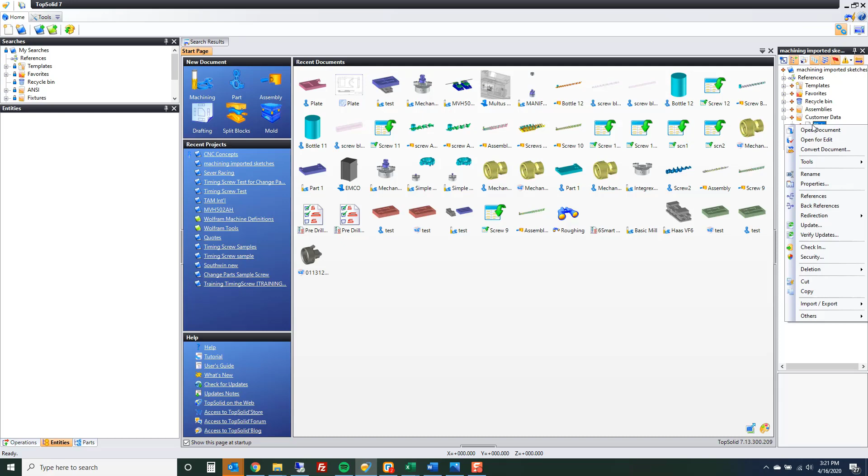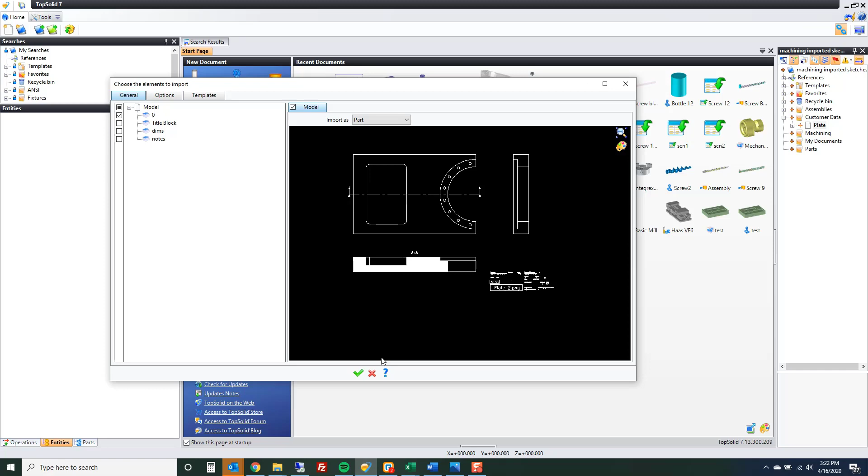So if I go here and choose Convert Document, when this comes up, of course I can zoom out, look at my model. I can look at the layers that are there if there are any layers already. So for example, I don't care about the title block, I don't care about the dims or the notes. We'll just bring in everything else. Apparently whoever made this one left all that stuff on a random layer as well. So we'll go ahead and click OK. Now we have our part.

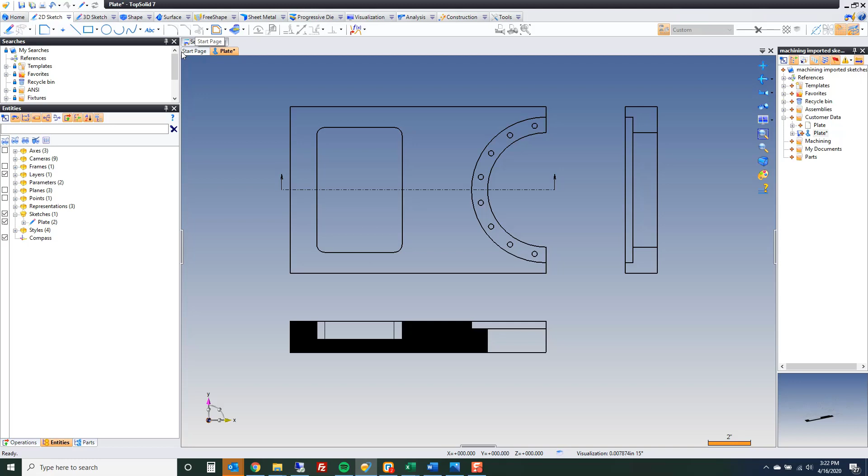Before we can do anything with this part, I want to simplify some things. So first things first, I'm going to go to my sketches here. I'm going to right click on my sketch and make it editable, because when you import a DXF file, it's imported just as you see. I'm going to say keep profiles. This will get rid of all text. But it's not really a usable entity yet. Now it's a usable entity. Now I can edit this.

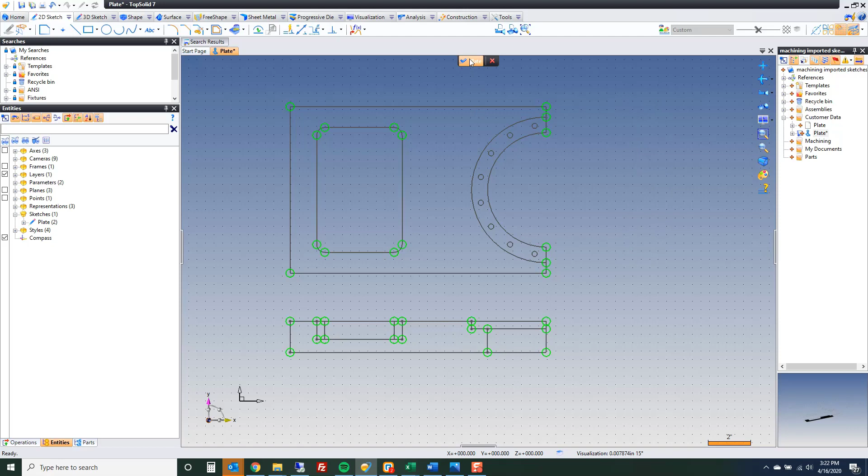Now, if you have a drawing on your workbench already and you already know the depths of everything, you can get rid of everything you don't need. I'm going to say I don't want that. I don't want this. Maybe I don't need this. I don't need this. And since I have all the information down here, I don't need that one either. But I'm going to leave this one just for fun. And now that's as far as I'm going to take it.

Now, before I can send this into a machining document, I need to tell TopSolid to add this to the representations, because again, it's always looking for a solid model. Since one doesn't exist, we're going to kind of cheat a little bit. Let's put the plate in the design representation and in the detailed representation. It needs to be in at least both of those. If it makes you feel better, throw it in the simplified as well. Hit save, I'm going to hit Control S in my case.

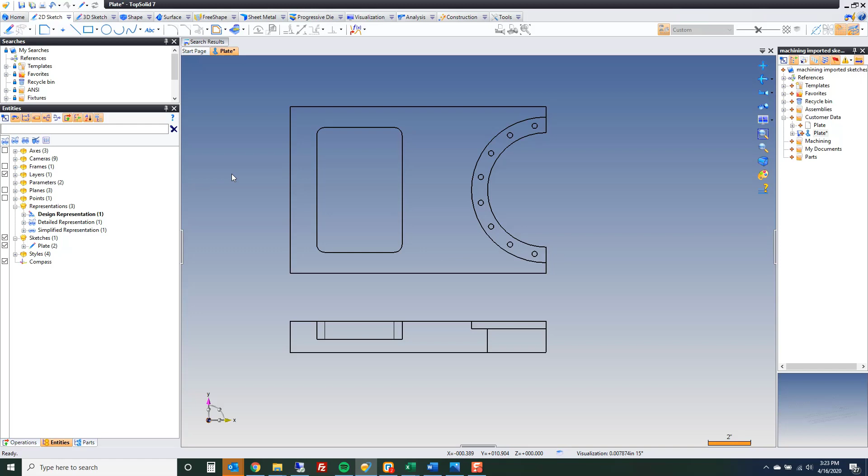And I'm going to send this into a machining document. In this case, I'm going to use a template. You can use your favorite template. I'm going to go ahead and validate, and that's going to load a CAM document and include my 2D drawing there. Now here it's asking me if I want to build stock. I'm going to say no stock, just to show you complete down and dirty how to do things.

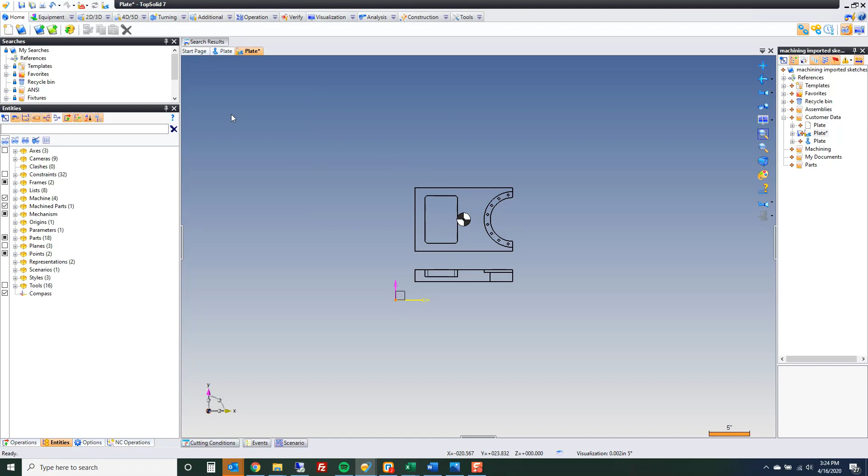Next, it wants to know if you want to position this. You can, but the plate already exists on the XY plane. That's really all that matters. So I'm going to validate my positioning group. About the only thing that I care about is where I put my 0 or my G54. So let's fix that right away. I'm going to edit this, turn off automatic positioning, and put it at the midpoint between that segment and the center of that. Perfect. That'll be my G54. Like that, I'm ready to start working.

Now, before I can start working, I've got to work on these profiles, because if I tried, for example, to go to end milling, go to my geometry and select this, you see how it's selecting just single segments? That's because on imported geometries, the software doesn't know what goes with what. It's just imported dumb sketches.

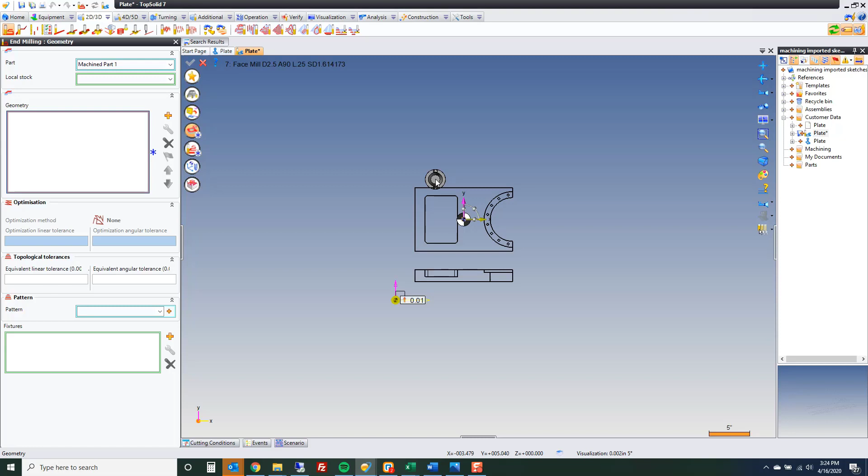So instead, what we're going to do is rebuild our sketches. In some cases, we're going to rebuild by drawing new sketches. In other cases, we're going to project sketches. And the act of doing this also lets us clean the sketches at the same time. Now, this is one method to get to the finish line when using sketches only to create toolpath. There are about 2 or 3 other ways to do this.

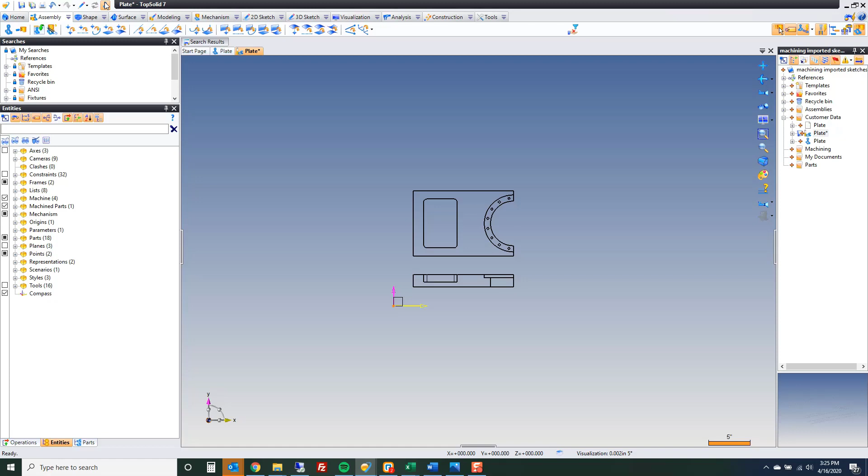So here's what we're going to do. First, I just want to make a rectangle representative of the entire top of the part so that I can create a facing toolpath. So I'm going to right click, make a sketch. I'm going to go to my rectangle command, parallel the axes, and I'm going to go from point A to point B. Perfect. I'm going to validate that sketch.

I'm even going to go into my sketch folder here, and I'm going to call this sketch for facing, just so that I know what it is. Okay? I may turn that off for the moment. Next, I'm going to build another sketch for this area out here to cut this open pocket.

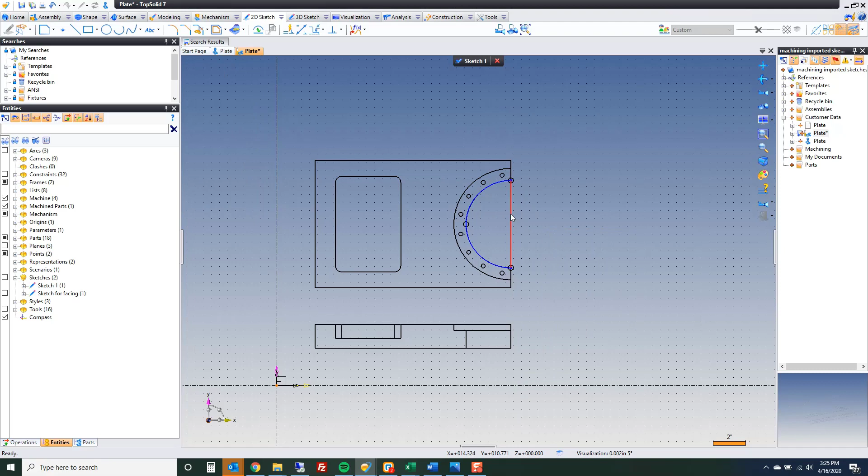So I'm going to create a sketch on the XY plane. This time I'm going to project that sketch, and then I'm going to draw a line connecting the two. This is just so we can describe the open section of the sketch for pocketing. I'm going to validate out of that.

I'm going to rename this open pocket sketch. Now, you don't have to rename these sketches. That's completely optional to you. Okay, I like to do it so that I know what's what. Now, from there, turn that off. I'm going to go back to CAM mode up here.

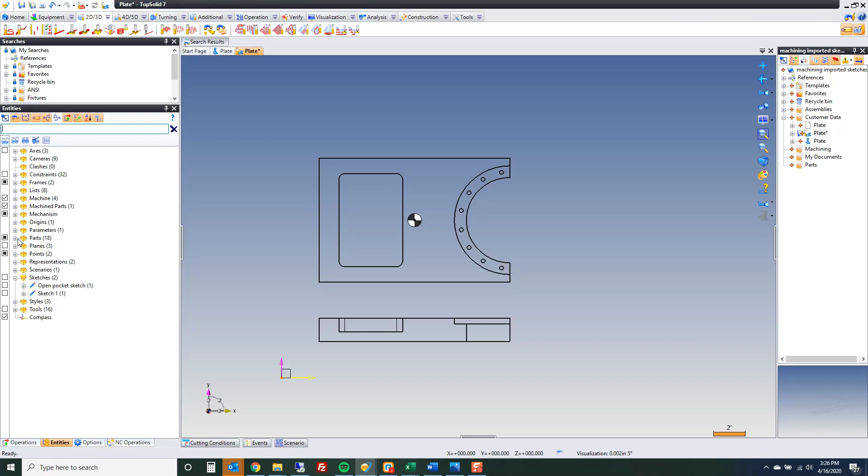And then back in my entities tree, I'm going to go to my parts folder and I'm going to turn off what the software sees as the machinable part. That's that part that I included. This way I can focus on just the sketches I want to work with. So I want to work with my sketch for facing. Here, select it, right click, go to end milling.

You can see it's looking at the entire sketch now. Mine came up and chose my face mill because that's my first tool in my tool list there. Here you can see there's an asterisk. There's an asterisk here because it's missing a bunch of things. If you notice, it's even telling you what it's missing. It's pretty cool. Okay, so let's click on that and let's go to where the problem is.

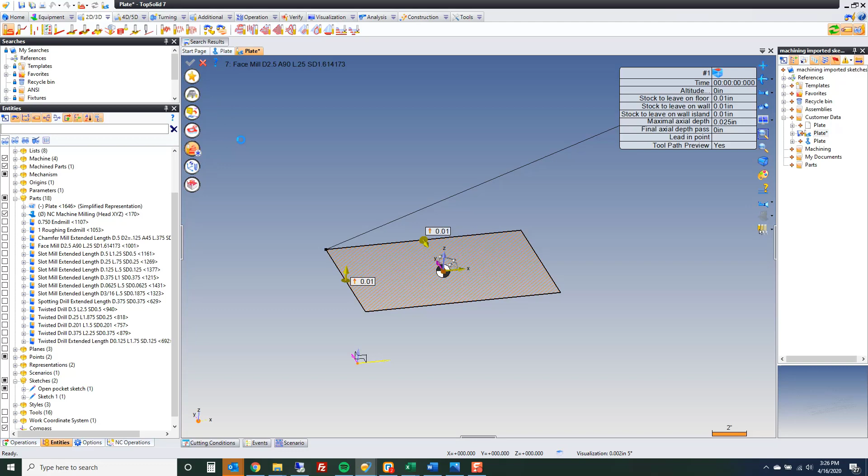If I come up to my altitudes tab, notice my starting altitude is missing, my clearance, all these final altitudes are missing. So the starting altitude is where the toolpath is going to start calculation from. The machining altitude is where it's going to machine to. Okay, so I'm going to start at 1/8 inch above my 0. My machining altitude is based off my profile location, which is on my Z0 right now, so that's perfect.

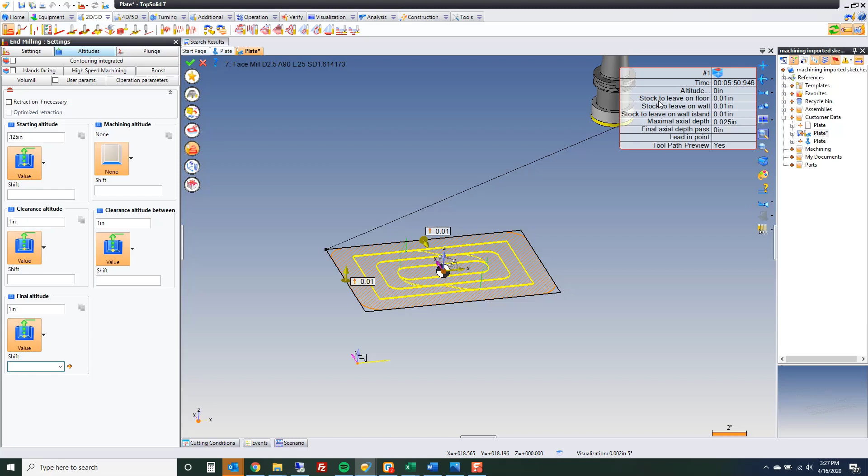And now here, I'm just going to start adding my different rapid planes. Once you have them, you're going to get toolpath. Now, right now, this is set to pocket. If I set this to an open pocket or a facing or something like that, we'll probably get what we're looking for here. Let's go ahead and validate. Oops, looks like I made a mistake. Let's go back. There we go. Clicked too fast. Here we have our facing, as you can see.

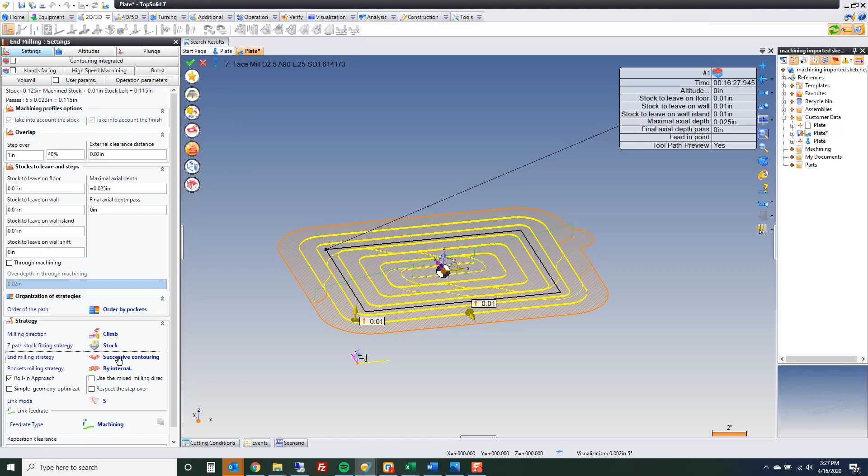If you want, you can change the strategy of the facing. Come to successive contouring, change it to sweeping. You can set how and where this is overlapping. You can even go closer to the part if you want. Would help not to fat finger the value. So if I say -1, you see that sucks it in closer to the part. Okay, and like that, you have your facing.

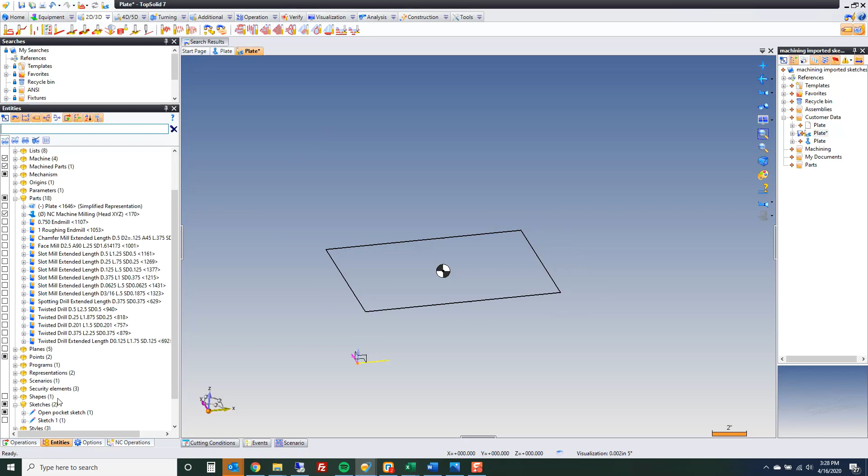Perfect. Now, let's go to our entities and let's turn on our open pocket because that's what I want to work on next. So my open pocket, again, I can go here, start in space even. I don't want to use this tool, so let's go change our tool. I'm going to say, how about my 3/4 inch end mill instead? That looks good. We need some geometry, so let's go to geometry, click here.

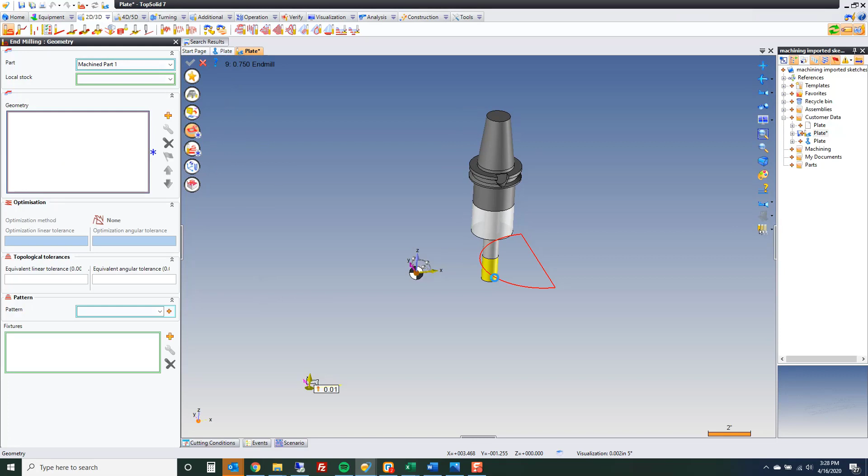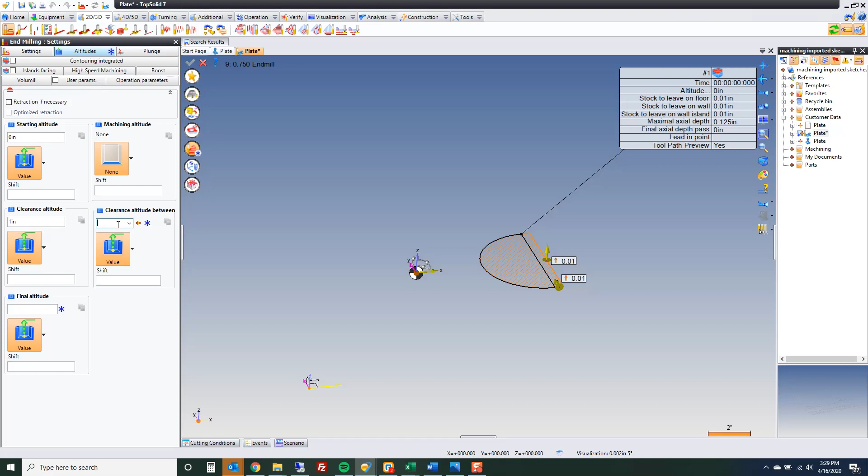Let's change this to open pocket because that's what we want this to be. And then in my geometry section, I can double click on open zone and say this is the open section of that pocket. Okay. Now, again, we have to set our altitudes, right? So the starting altitude is 0 because, again, we've done our facing. The clearance altitude, this is your rapids, right? Now here you only see one pass. Why? Because the machining altitude is machining to the altitude of that sketch.

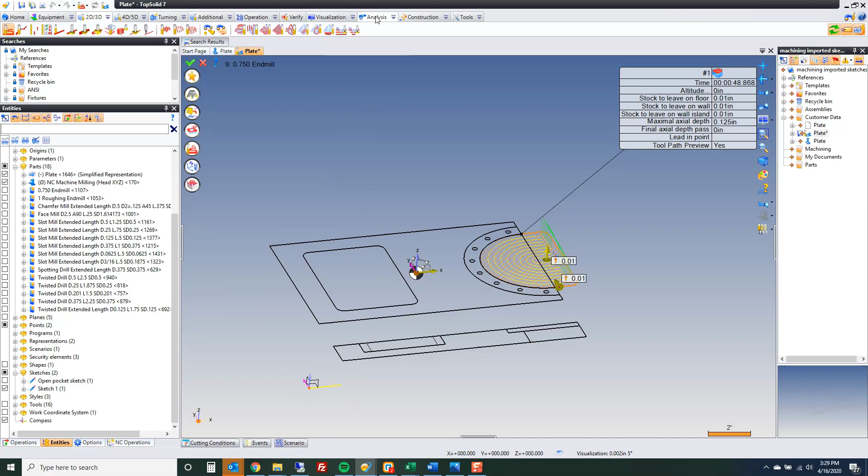Now we want to change that, but we don't know how deep to go. So let's go turn our part back on, right? And we can go here, go to Analyze, and Measure. I'm going to measure this segment. Look at that. That's 3/8 of an inch. Perfect. I can turn this off, zoom back out, and now I'm going to come back into my machining altitude, and I'm just going to set this to a value from my G54, right?

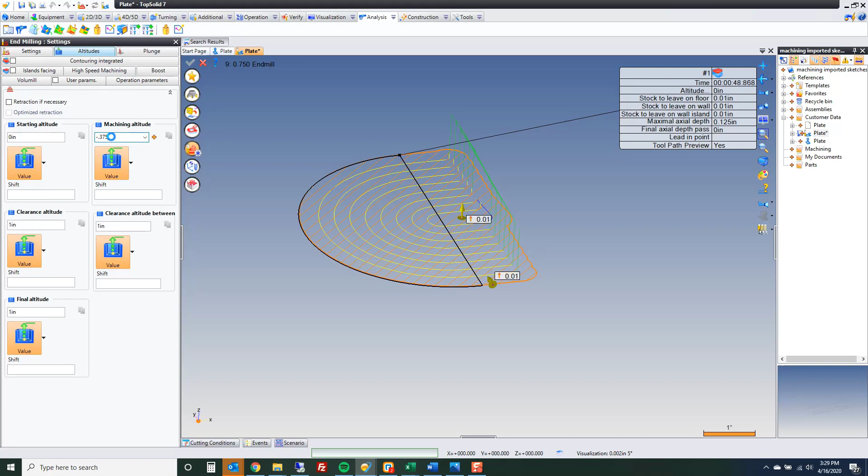So -0.375. So it's plunging in the open zone. Off we go. We're cutting our pockets. All the other settings in there work like normal TopSolid CAM settings. Okay? So let's review. We've done a facing. We've done an open pocketing. Next, let's look at another way of controlling this.

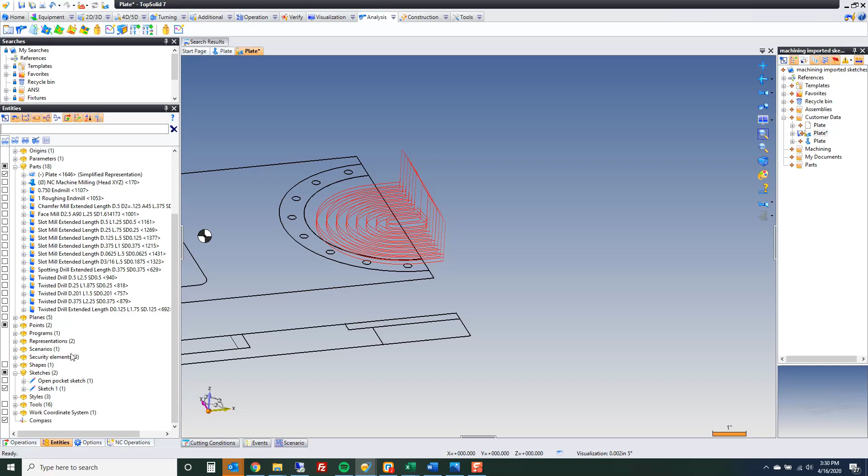Okay? So if I go back and turn on the overall part, right? I'm going to turn off this sketch. If we look at this, there's some kind of shelf right here, right? And you can see that right there. And that's actually 3/8. So I made a mistake when I measured before. It should have been the plate thickness for this through pocket. That's okay. Let's go see if we can fix that really quick.

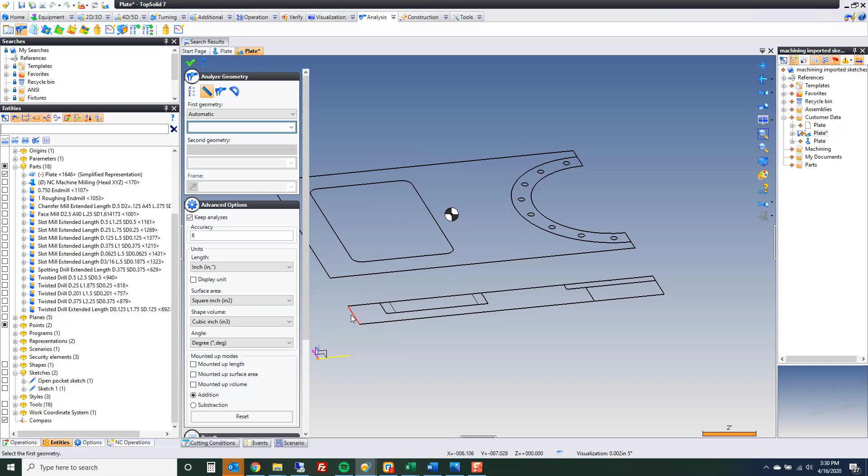Let's go here, analyze that length. It's 1.5 inches. Great. Let's go back to this operation really quick. Go to settings. Go to our altitudes and set that at -1.5. Better. Okay. Now, let's go back here and now let's make this one. But to be different, I'm going to show you another way to work.

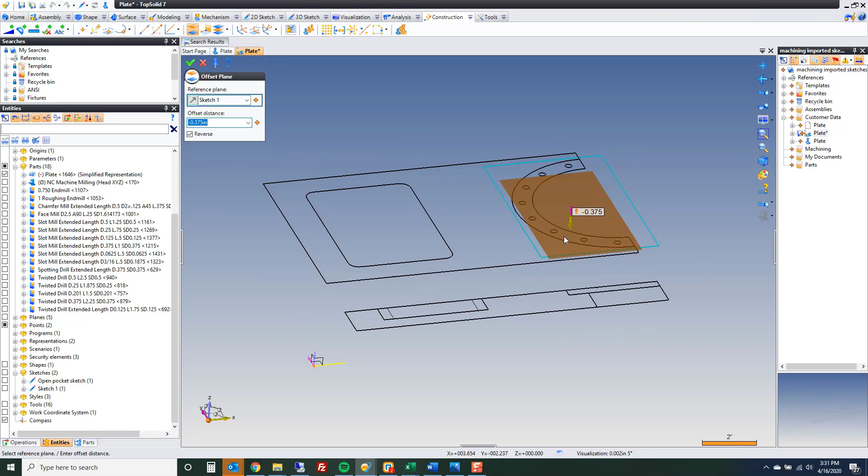So every time you're machining on profiles and just strictly to profiles, it's always going to machine to the altitude of the profile. So if we know that about TopSolid, then the best thing that you can do is put your profiles at the correct altitude. So this is what I mean. I'm going to start by going to my construction tab here and offsetting a plane. We know that this detail here is 3/8 of an inch down. Okay, so you can see that I practiced before making this video. The value here is already at 3/8.

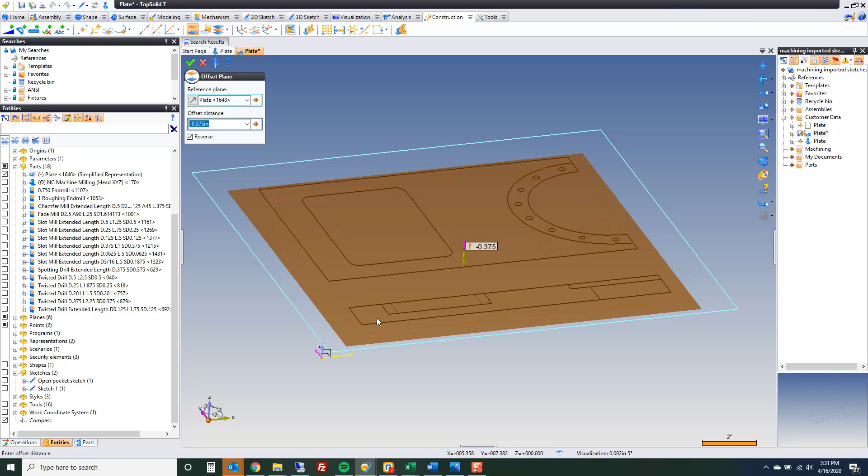That's perfect. Okay, we also want to do another offset, right? So let's offset again. We can do it from this sketch, that's fine. And we want it to be the depth of the pocket here, but I don't know what the depth of that pocket is. So what happens if we would go and measure it? We can go select this, and that's .875, cool. But we want to be in the negative direction, I believe. So let's flip this, perfect. So now we have our two sketch planes that we need.

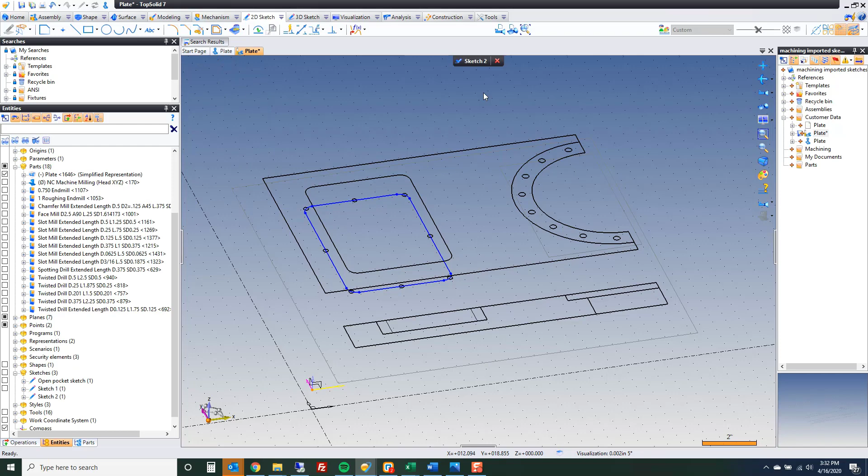Let's start with this .875 sketch plane. We'll start a sketch there. I'm going to go to project, and I'm just going to select these edges. You can window select them if you like, doesn't matter. And now those are at .875 deep. Perfect. I can even name that one blind pocket. Okay. Now I'm going to go to this plane, make a sketch there, again with project.

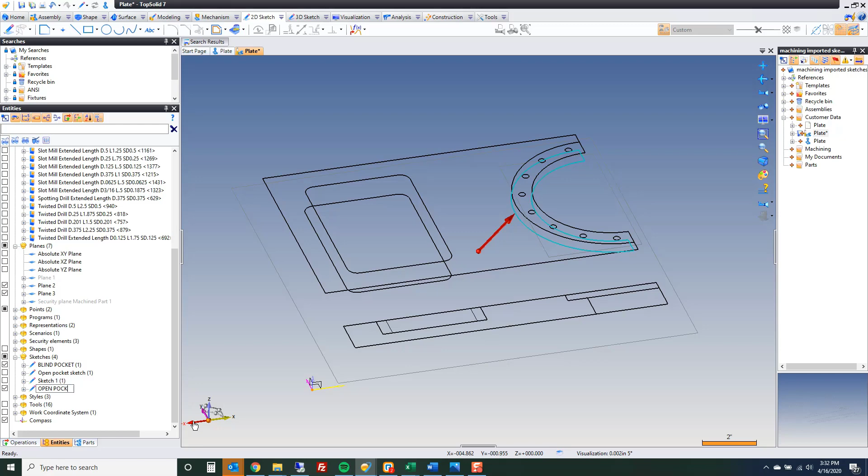I'm going to project just the edges that we need. Okay. And maybe this one, if we go down to sketches here, this is going to be called open pocket 2. Perfect. All right, let's go back. And then from here, again, I'm going to go to my entities tree. I'm going to turn this off, and we can do our machining. Okay. I can even take these planes if you want. Notice they show up here when you select them. I can turn them off. I don't need them anymore.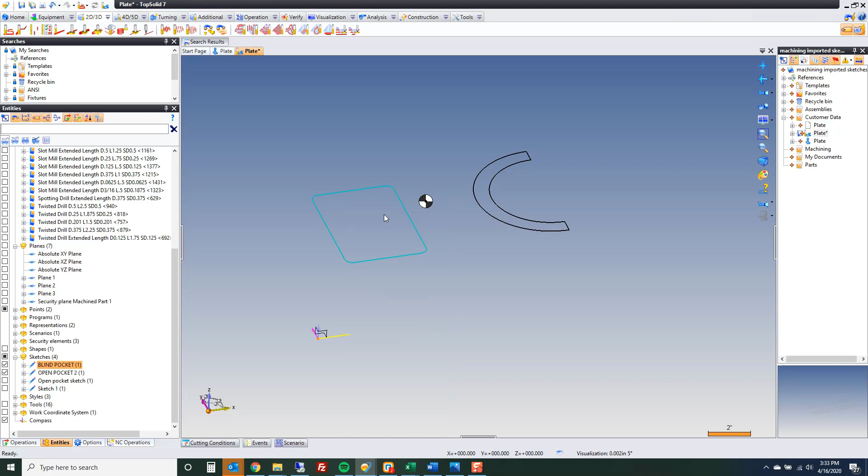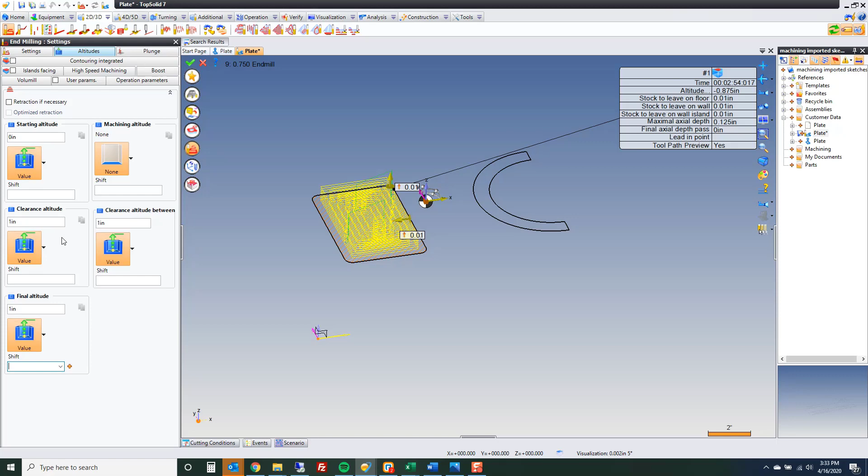So let's start with this one. This is going to be our pocket. We'll go to end milling, right? We're going to go here into our settings. The only thing we need to worry about is the starting altitude, which is 0, and then our clearance altitudes, right? These are the rapids. The reason why we have to type those in is, again, TopSolid is looking for 3D shapes to calculate all this stuff off of. When it doesn't have them, you have to input that information. So there's the pocket. Let's do the same thing on this one.

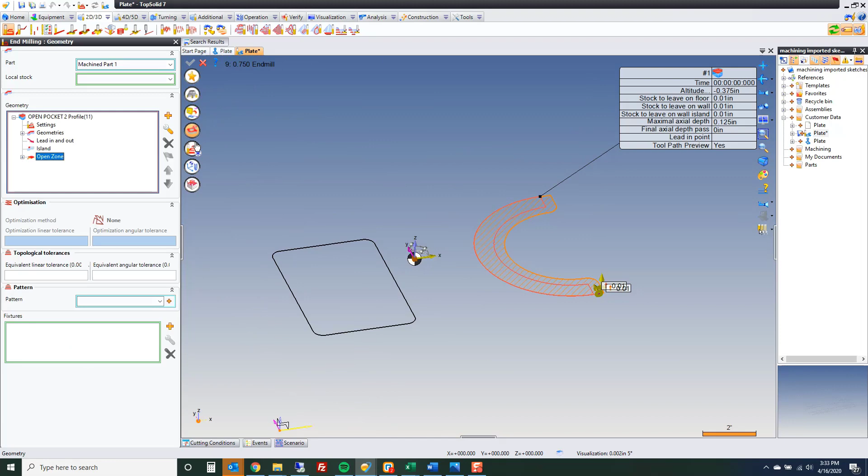So let's go here. We'll do an end milling. Let's change this to an open pocket. We'll go ahead and go to our geometry really quick. And we'll come up here, double click on open zone, and this time we're going to say all 3 of these segments are open. Perfect. And then why don't we see if we can borrow some values. I'm going to say I want to use the same pocketing routine as that.

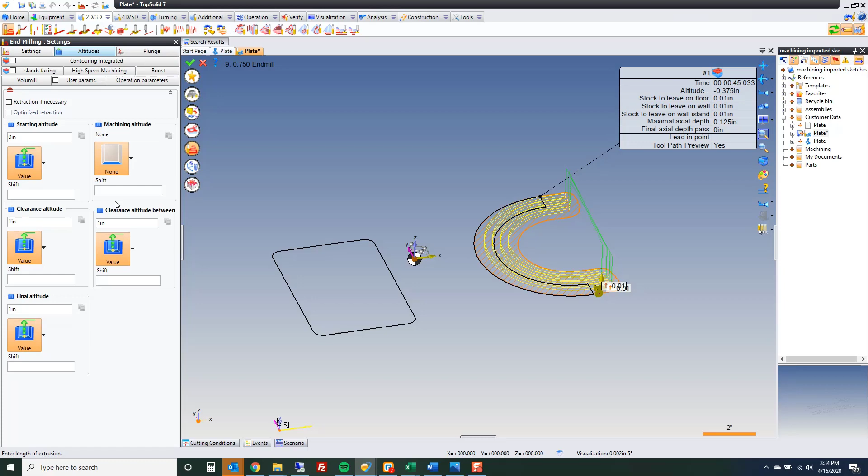There. Perfect. And all that did was let me drag and drop a copy so that my altitudes were all correct. So I'm going to go back here to none. That's perfect. 0, 1, 1. And we're good. We now have an open pocket. We have our pocket. We have our other open pocket.

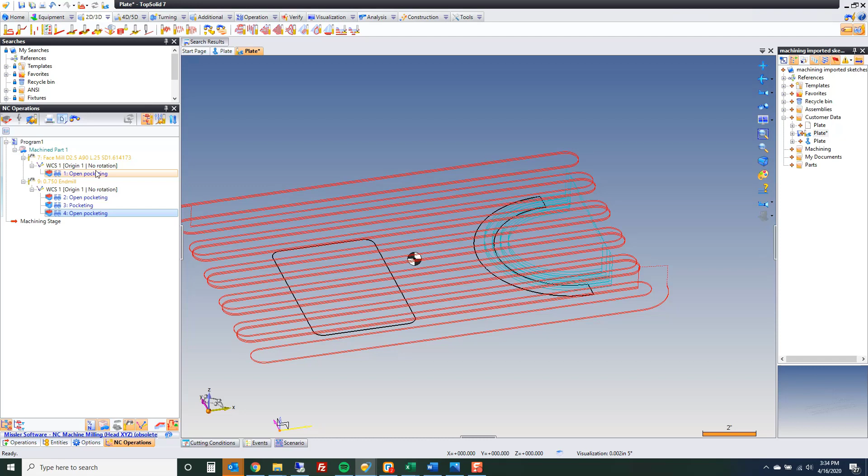So again, this is showing you another way to work with TopSolid. It's just showing you a way how to import a DXF, and then bring those geometries over, whether they're clean, bad, good, doesn't matter. You clean up the geometry a little bit inside TopSolid CAM, you make your toolpath, you move on.